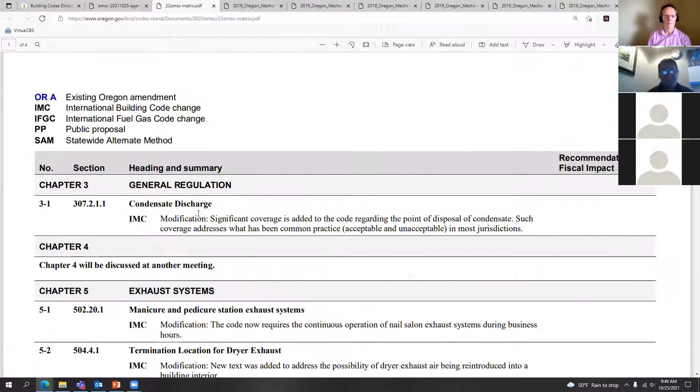This is what's going to help us through the flow of the meeting. Each item has a number - I used the chapter and then it's 5.1, 5.2, so that we can add more without renumbering a million. This is just a tool. It will change over the course of the committee meetings, and I'll be updating them after every meeting. I'll be posting them and then emailing them to all of you, the committee members, to make sure that I annotated everything properly, and the way that you think the committee went. I will get things mixed up sometimes just through editing, so please keep me honest and I will fix everything as we go.

Then over on the committee page, there's the code amendment proposals - we have 4 of them. None of them are on the schedule today, they will be on the next meeting. And here's all the code docs that we will be going through, which you can see from the committee page.

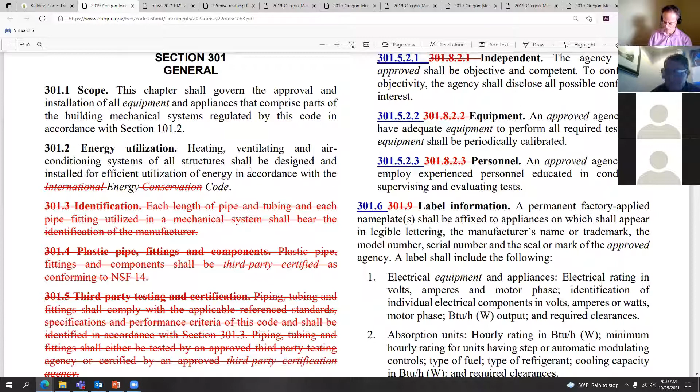And in each code doc, we have colors and other markers you probably need to know what they mean. The cross-through in red is what we - our current amendments - currently delete from the code, from the model code. If it's underlined and blue, it's our added language to the code. If it's in a box, it's usually a text box - you guys have seen the code - it's a note or some information outside of the code. And then if there's new language - if it's new IMC language, it will be in purple. It doesn't look purple on everybody's screen, so I learned that.

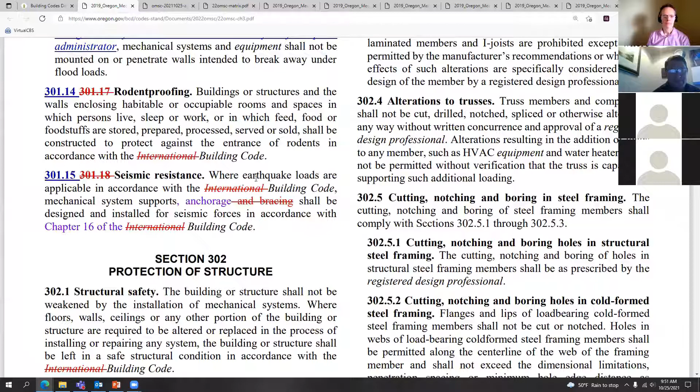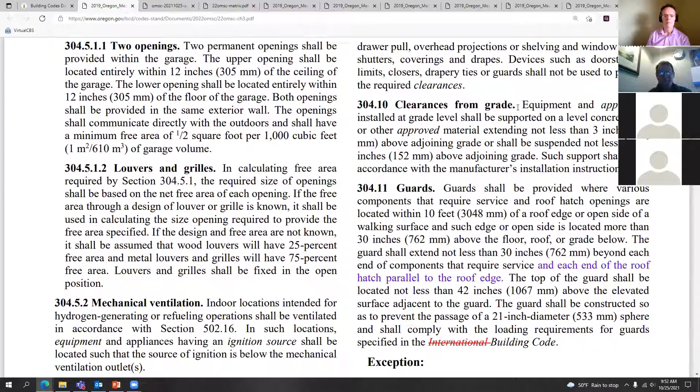It looks super purple to me, but that's new language. If we have to show the strike-through language, I do have the significant changes, or the red line, to show you and put up on the screen so you can see exactly what was deleted. There might be a few places where that is. And if we add any language, a new code amendment, I'll make it a lighter or brighter blue with underline, or a brighter red for strike-through. That will happen if you guys make any edits during the process.

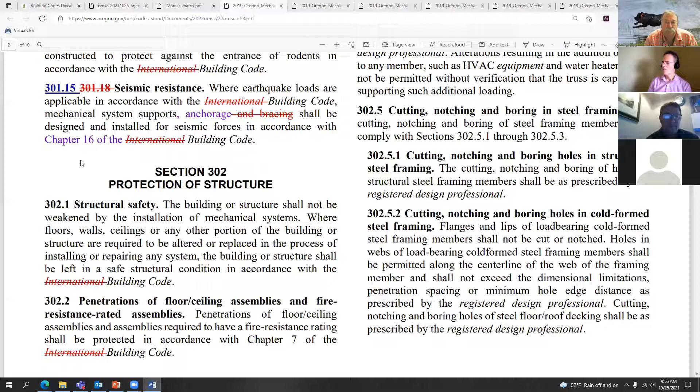So we'd scroll down a little bit more. We might head down another page and maybe see some of the minor purple things that happen in the model code about bracing, where they're under seismic resistance under 301.15. Again, really big coverall here about when earthquake loads are applicable in accordance with the building code. We reference chapter 16 of the building code and talk about anchorage in our code. So this has been a long-standing revision for us here in Oregon, but I just wanted to point out one of those purple pieces.

And we will try and head down to our first matrix item.

Laura, if you could stop for just a second, go back up to show people - we now have a revised barriers for vehicles drawing. It's been revised, much clearer now. I'm trying to remember which code it was in, but one had a typo where the pipe bollard option 1 said 1/2, not 12-inch depth on the bollard. That's been cleaned up, a lot easier to read.

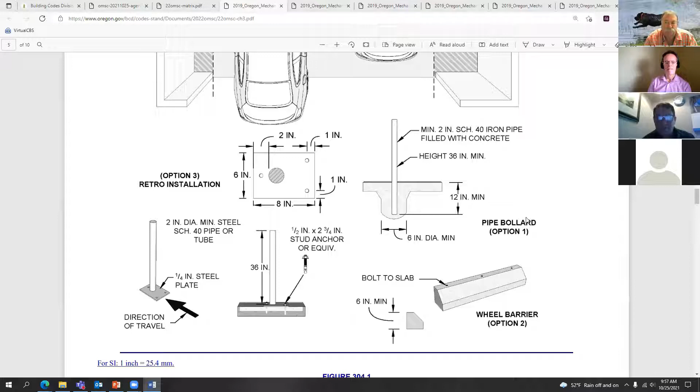Staff redid these. One note about this is that in the structural code, there are requirements for protection of appliances in parking garages, and some of that comes here - this is for when you're in a commercial garage, protecting any appliance. They either need to be elevated, or if they're down low to where someone might hit them, there's a requirement for protection of appliances. This is sort of the private garage view. Thank you, Laura.

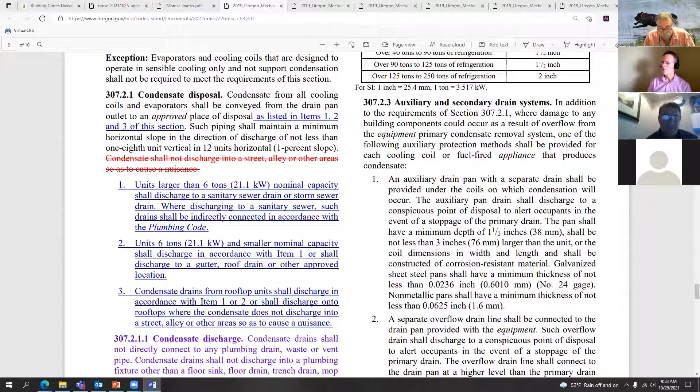So here we are on condensate disposal - this is our first matrix item, 3-1, about condensate discharge. The discharge - they're discussing how and where it can be. It's really complying with our plumbing code. To be an indirect, it needs to go either to a floor drain, floor sink, trench drain, mop sink, hub drain, standpipe, utility sink, or laundry sink.

What they're clarifying - and the commentary has a really nice description of the different places that the indirect discharge indoors can go to - and also showing that there is an allowance for connection to the lavatory Y branch or tailpiece, or to a bathtub overflow tailpiece, is allowed. That is done under our plumbing code as well, just clarifying where and how you can - don't just have it drip into a standard lavatory, say in a dwelling unit.

And one other clarification in 307.2.1.1 is the last sentence that says, except where discharging to grade outdoors, the point of discharge of condensate drain shall be located within the same occupancy, tenant space, or dwelling unit as the source of the condensate. So this is to really make it clear that, yes, if it happens to plug for your dwelling unit, you see it's going to where you can have someone service it, so that they aren't crossing potential lines of ownership or rental agreements - so tenant space A, their drain has to connect either within the tenant space or be piped to a separate outdoor discharge to make sure this can be maintained.

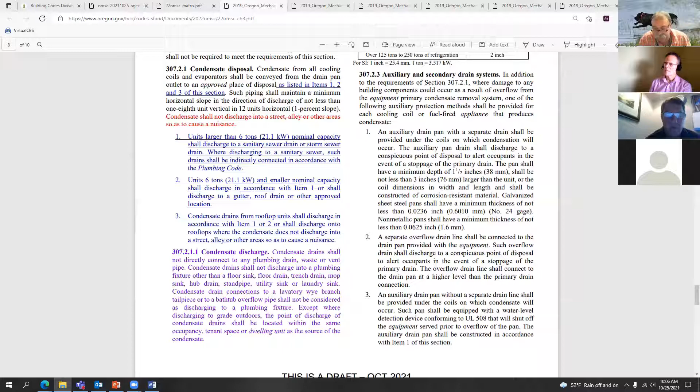And then I did have one other question on 307.1.1 identification. Is a Sharpie okay? Determination.

That sounds like your approval on this one. I don't think we have enough clarity here, and we could maybe ask, we have an ICC person here, whether they know what the intent was at the national level.

Rich, are you available to maybe give some feedback on 307.1.1 on the identification and what the intent was for that?

Yes, sir. Sorry, I was trying to get my mute button to come up. I apologize for the delay. The intention, if you look at the code proposal, was just to make sure we're identifying which one of those is the primary and secondary drain, so it's readily visible to the occupants when the primary is stopped up. I do agree it would be up to the building official's interpretation of what they would accept for that. But there was no requirement to say a permanent sign, anything like that. I don't know if that helps or just adds to the confusion.

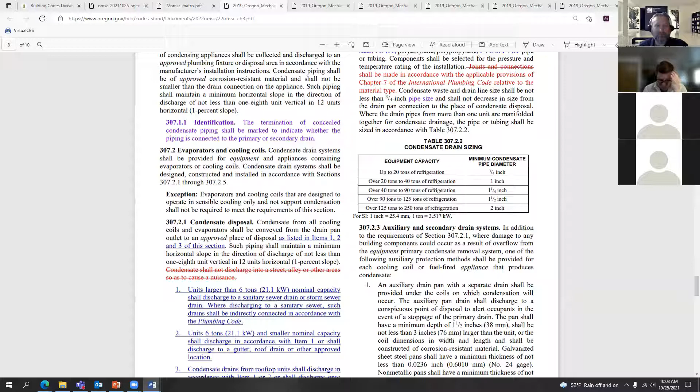And back on item or option one, I was going to say I support the notion of adding 'or approved location' to give the code official some latitude there. Yeah.

So to the committee, let's start with this first on maybe getting some clarity about the larger ones. Is this language acceptable to everyone on the committee? Jeff, yay. Nate, okay, I'm good on it. Yeah, it's always been clear to me. So we're good with that.

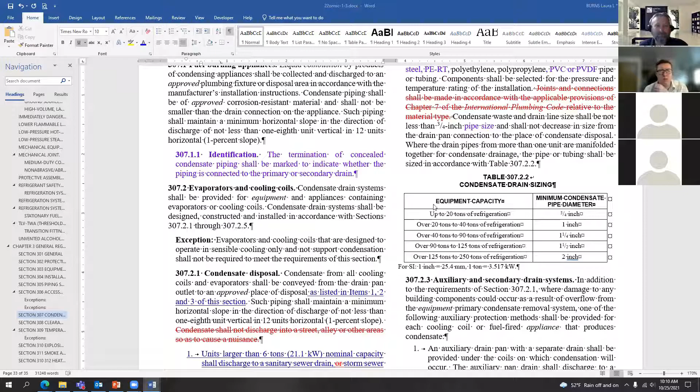And then as for the new language of 307.1.1, it looks like this is really just making sure people can identify, and that your inspectors can clearly know when they're out there which one is which and where it's coming out. Just knowing the number of different ways this can happen, this is going to be your inspector's call. And then, so now down to our one big matrix item in chapter 3 about marking—

Can I stop you really quick? Yes. Sorry, but this is an example of what I'm going to bust in with, the change for the 'or other approved location' there, for the non-technical person, which is me. Does that open up less expensive options for someone doing this? I'm prying about the fiscal impact, which is going to happen again and again. Do you think this will create any cost savings, cost increases, anything like that?

From the chief's view, it's more a clarity issue of what has been happening in the field. I would say to the building officials, it's probably been that, although it could be called a potential cost savings or clarification.

Jeff? I really don't see a whole lot of cost increase or decrease. I mean, it just seems pretty basic and straightforward to me. All right, thank you both.

So to the 307.2.1.1 about the condensate discharge, this really is an alignment just to make sure that you aren't violating the plumbing code on how you connect things, and make your indirect connections to.

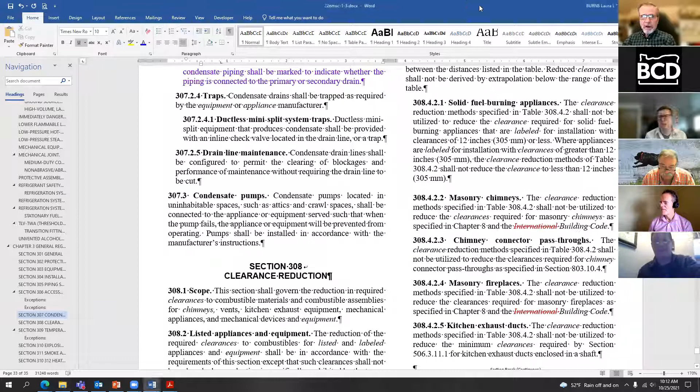Is anyone, if there are any other issues or things you'd like to look at in chapter 3, we've tried to make sure we get things that have to do with the fire code, we take some of those pieces out. We're addressing other parts later when it comes to chapter 5 and hazardous exhaust. We take out all of 310, all of 311, and when it comes to load calculations, you always have the ability to look at other design criteria, but we don't sub-reference to the I-code here. We stay within the mechanical code for sizing your equipment.

So with that, people okay with moving on to chapter 5? Hearing no further discussion, let's move on to exhaust systems. So if on our matrix...

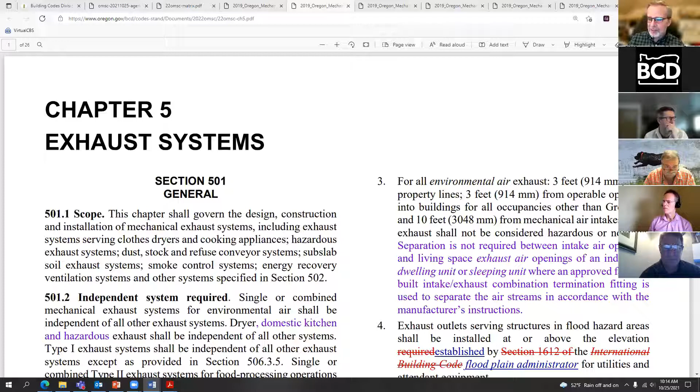One item here, and there's also a proposal about this later, but the very first item I'd like to show is item 5, let's stay up in 501. This always gets to be a fun item about what has to be an independent system. They're finally clarifying that 501 starts with...

Exhaust for environmental air being independent of other exhaust systems. But environmental air exhaust includes dryers and domestic kitchen exhaust. So one thing they're noting in the second sentence is that dryer exhaust does need to be independent of other environmental exhaust, such as bathroom exhaust, and that the domestic kitchen exhaust needs to be independent of those.

And also clarifying, yes, that hazardous exhaust needs to be independent of any other system. So you can't combine kitchens with bathroom exhaust, you can't combine dryers with bathroom exhaust, you can't combine dryers with hazardous exhaust. So just one of those clarifications that it's taken about 3 or 4 goes at the scope and the independent system language to finally get that clarified.

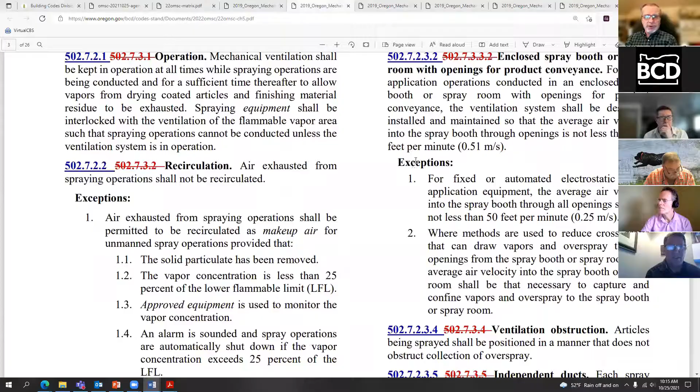This is just a little clarification on that. So we'll move to one of the... okay, we'll keep going, Laura. We are at 502.20.1, which is on manicure and pedicure station exhaust.

Oregon was one of the first states to set up the requirement for exhaust from manicure stations. And of course we know the building officials have always had the comments of, well, I'm using clean nail polish, do I really have to do this? And how do I set these up?

It's in the model code now. The one item here is that the exhaust for those mani-pedi stations needs to have controls that operate the system continuously when the space is occupied. Some people have had them where they don't turn them on. It's really to say that when the building's occupied, you need to be running these exhaust systems, which aligns with standard operation of most exhaust systems. It's having some sort of interlock or whatever to make sure that when the building's open for business, you do run the pedicure exhaust so that you're getting those fumes from the nail operations.

That's a model code change. This likely would have a potential cost impact because it potentially triggers some interlocks with the occupied setting of the thermostat, a building time clock, or an occupancy sensor or something to make sure this is working. I think they might have had some discussion at the model level about making sure this ran, because people were just turning them off, and you're still filling up the building, or your neighboring tenants, with a lot of those odor complaints that I think a few of you have been through in the past.

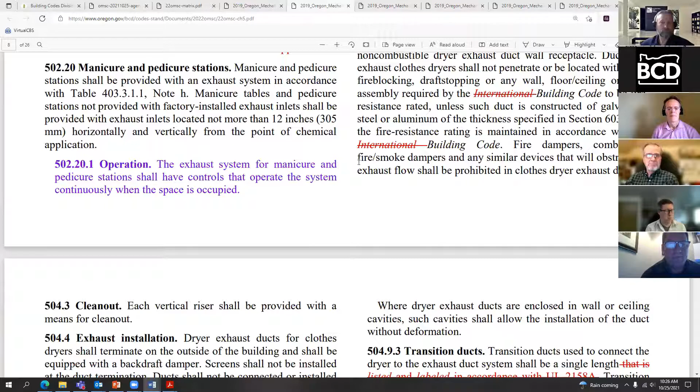Next one, let's go to termination of dryer duct exhaust. So some residential dryer MIIs do list termination locations, and a lot of this residential dryer information relies on their listing and how they've looked at the setup for their particular dryers. Some can move air farther, some have differences in what they want for their discharge opening, but they're getting pretty consistent on that. This is stating that when the MII doesn't have a specific termination location, they need to be not less than 3 feet in any direction from openings into the building, including openings in ventilated soffits, because certainly we've all been out and probably seen a dryer duct that went right up into somebody's residential attic vent. This is to help clarify that.

I believe some manufacturers actually tell you to be even further, even lower, just like for condensing furnaces—everything's relying on their MII now, and some have specific instructions to make sure the water vapor doesn't go back into the building. So this is really, from my view, sort of a clarification that you can use the MII, and when it doesn't have a specific restriction, you need to be at least 3 feet from where the dryer ventilation might go back into the building.

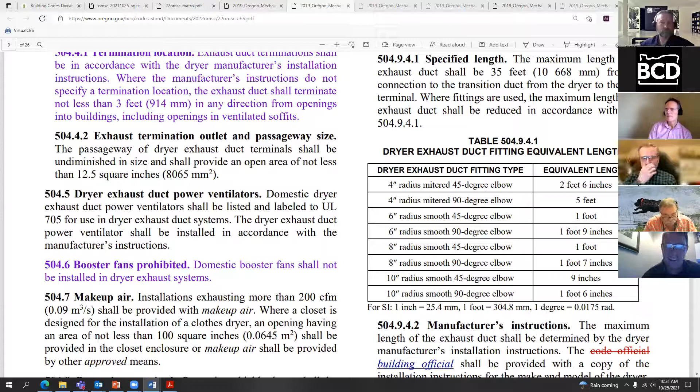Seems superfluous, but as long as 504.5 is in there, I don't see that we're going to have an issue. Choose whether it's no harm, no foul, or whether you'd like to do something about that. I don't think it hurts. I guess it doesn't hurt. And when you put it that way, it doesn't hurt. I mean, if anybody needs clarification, there it is. Okay.

Next item on the agenda is something we've had—it's an Oregon amendment that's been kind of significant with the mechanical officials the last time around and the board—about domestic duct installation. In the model code, they had gone with: duct shall not be joined with screws or fasteners that protrude more than 1/8 inch into the inside of the duct. So they were thinking about maybe some shorter pop rivets or short screws, but a lot of people, just to give some background, were uncomfortable with having to figure out, hidden inside the duct, whether that's really 1/8 inch or more protruding into the duct. That's why this was struck the last time.

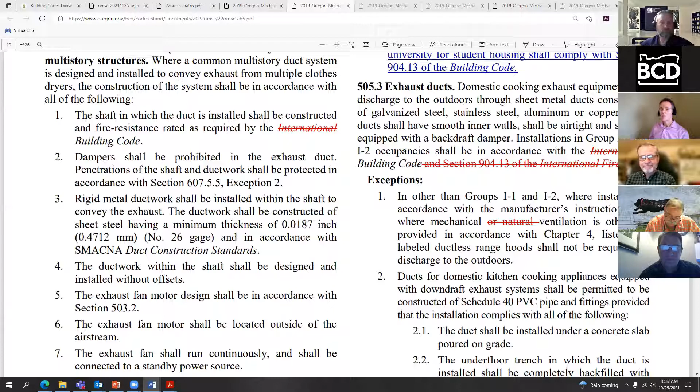And this is really aligning with chapter 4. The I1 and I2s do have mechanical ventilation for their cooking appliances for those locations. That's one location where we do want to have a hood there for them to continue to take out - no options for doing natural ventilation for domestic appliances in an I1 or I2. Really want to be able to exhaust that out. That's just a minor past modification. Any heartburn continuing that?

Let me just bust in again for a second here, same basic question I'm gonna be asking all day. Does removing natural ventilation as an option create costs for anyone, or are the other options you would be required to use more expensive?

This, real quick Andy, this was an existing one. So this is just continuing an existing, this is not a new one. So then don't mind me. Same with this, it's just continuing a past allowance.

Laura, was this a pass? I don't believe. I want to make sure on this 505 point, let's look. Yeah, it's 505 point. We have removed this in the past. Yeah, I don't see it. Oh, I believe this had to do with just sort of a redundancy. It's covered elsewhere in the code.

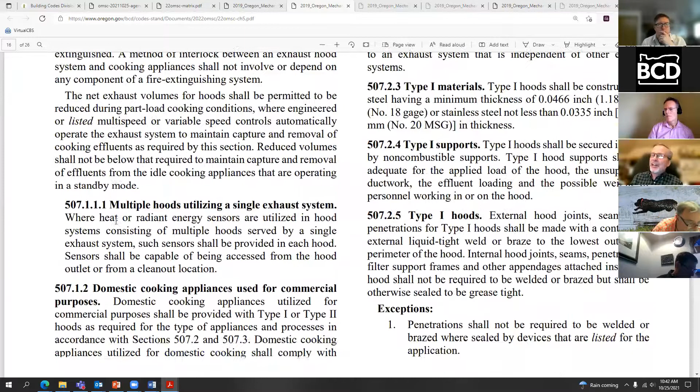We're not going to put in a type 1 hood in our little church or fire station or employee lunchroom, so here's our exception for that. Most building officials have asked that they put in their file what they're going to do with it, so that if they suddenly turn it into a commercial operation where they're cooking daily, or going from potlucks to 200 meals a week, you can say that's not meeting how they did their permit. So that last piece was a deletion to allow domestic cooking hoods for non-domestic purposes, out here in 507.1.2. I know that wasn't the best explanation, but it's just to eliminate a redundancy, putting it in the place where it's more appropriate.

There are going to be times where a domestic cooktop range or open top broiler might need to be used for commercial purposes that aren't appropriate for underneath a residential range hood. That's why we're taking care of that language here.

I think that's a better way to go than what's stated in 505.6, because that's an open door. Everyone good with that? Maintaining current amendment. All right, let's move on.

506.3.2.5, unless there are other items you want to go over. In Oregon, the mechanical officials have liked the grease duct test to either do a light test or another approved equivalent method. There are methods out there where they put a pressure washer down inside the duct and spray to the side to see if you get leakage out. Other than just a light test, this is providing options to let the building official approve a different test method for grease duct leakage. That's the main purpose here, it just gives you guys more flexibility in the field.

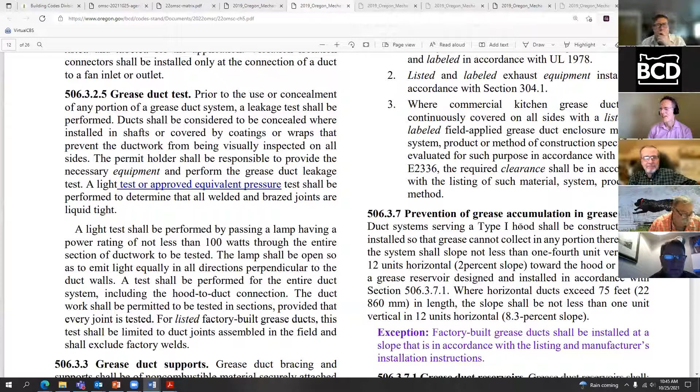Any questions on that past Oregon amendment? Good to go?

Grease duct slope. For those super long grease duct runs, there's been a requirement for a sort of trap clean out in the duct. A lot of these longer grease ducts nowadays are these new manufactured, factory fabricated ones, and their clean outs are a little different than the standard, where you're assuming you're welding a big rectangular duct for 30 feet horizontally. These manufacturers of the prefab ducts, that are fire rated, whole nine yards, have their own clean out version. This exception is allowing them to do their clean out version for clean outs and traps in accordance with the listing of the manufacturer's equipment. So that's another option to allow, if it's a listed grease duct system, to use the slope that's in their listing.

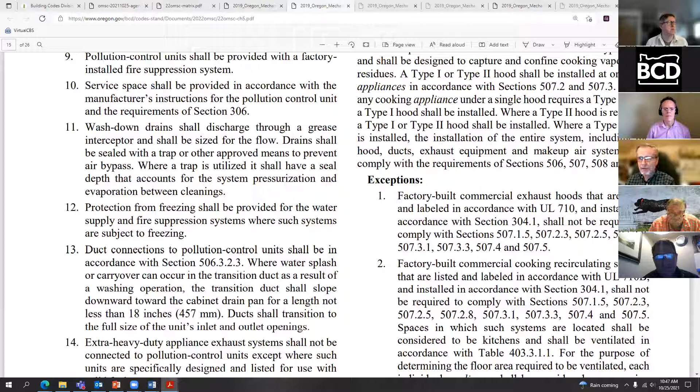Smoker ovens. I've had a lot of calls on this one in the past. Thank you, Laura, you can bring up the smoker ovens with integral exhaust and how we treat some of these.

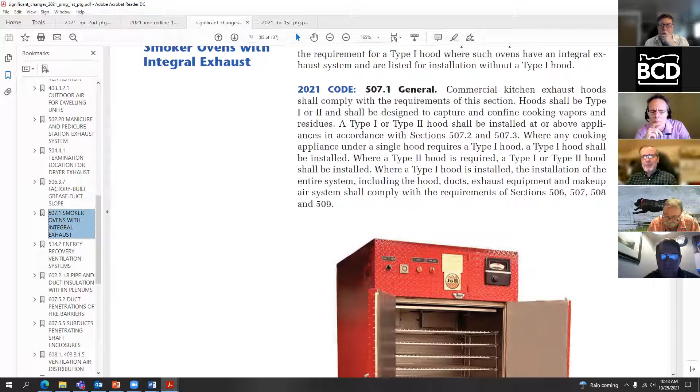There's now a new exception for smoker ovens from being under a type 1 hood when they have an integral listed exhaust system. We've always had these questions of what happens with these - it's odd, for what goes under a type 1 hood, it's sort of a square peg for a round hole, how does it fit in there. They now have listed units that have integral exhaust from them that allow them to not be under a type 1 or type 2 hood. There was always a question of whether or not they were grease producing. Well, they sure produce smoke, and a lot of grease does build up in the bottom of them, but if they have their own integral system, this is one of those pieces where they can go to the exterior on their own.

There's the new language.

This is sort of like the pizza oven issue we had in the past. It's designed to contain it, it's got the wood burning on it, it's got its own way of venting it. Putting a hood over something that's all self-contained, it's not going to exhaust anything from it because the doors are closed all the time. So just for my own education, an integral exhaust system on a smoker means there's a separate duct or pipe that goes to the outdoors for the smoke.

Yes. And so the type 1 hood is just for heat, really? Well, a type 1 is normally intended to grab smoke, grease that's being released - excuse me, type 2, sorry. Yeah, type 2 is mostly for moisture and heat. Yes, okay.

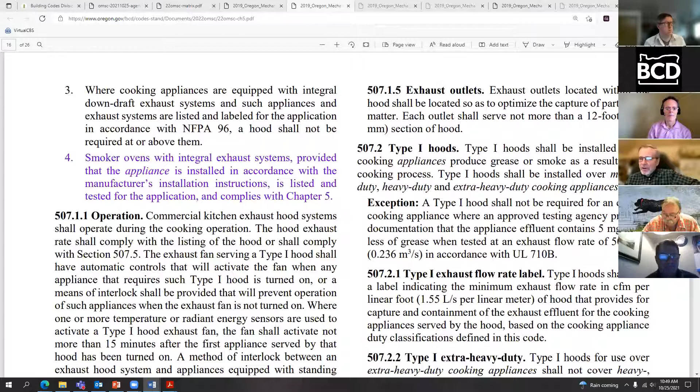So we're back to that last issue. I think we settled this one about what we try and do. This helps you when you deal with people who need to just put in a small stove or something for domestic type operation, allowing some flexibility for that break room, but also giving you some ability to look at these afterwards.

There was one instance where a local jurisdiction's grease police found out that there was grease coming from a certain location that had said they were just going to be an employee break room, but they were cooking for a preschool of like 50 meals 3 times a day, which wasn't what they had on their original permit application. So that's the type of flexibility we're allowing, but giving you the ability to address that in future.

Next item is, so I'm assuming we're good with that since we accepted the other change. Collectors and separators under 511.1.1.

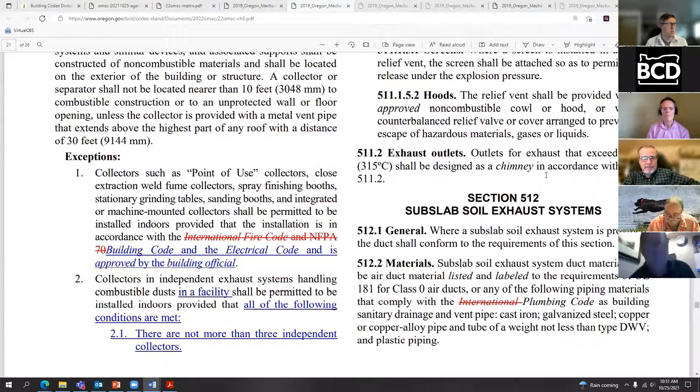And this has a lot to do with woodworking shops and the like, on making sure this is really an alignment to make sure that when we're looking at dust collection systems, if you'll scroll up, these are in the exceptions.

Oregon has had an exception to allow small systems to not do the full meal deal for wood dust collection with up to 5 dust producing appliances, and also noting that it's installed in accordance with the building code, the electrical code, and approved by you, the building official. These are, like for those small wood workshops, to avoid full-on explosion relief, but making sure that it is installed per our building code and the electrical code.

So this is for an approved system to do a little bit more flexibility on those small woodworking locations. Just a long-standing Oregon amendment that last code cycle got cleaned up a little bit more to make sure it was clear on how many drops or appliances you could connect to in a woodworking shop.

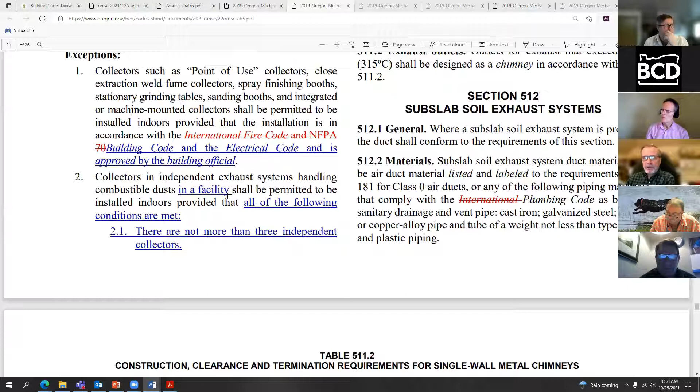We're limiting it so you could have 3 small dust collection systems, each serving no more than 5 appliances each, is the real intent. So you can have a small one for corner A of a woodworking shop, one for corner B, and one for corner C. That, and just making sure that our alignment is with the electrical code, and the construction portions aren't in the fire code. We now have brought those into the building code.

Any heartburn on this one or discussion from the group? We're good to go on that? All right, and last one is a new additional requirement

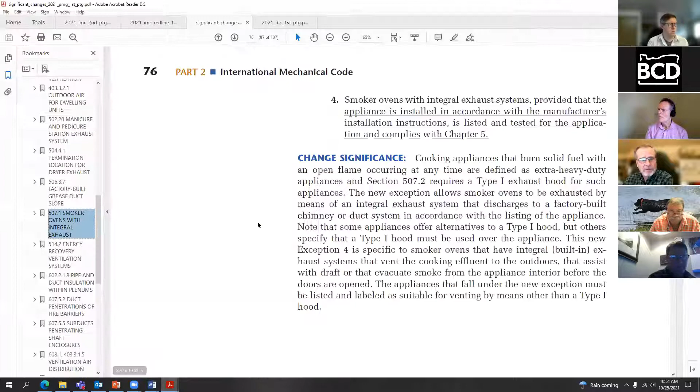on energy recovery ventilation systems. I'm looking for this. It's striking out the word. You can now do, you're now allowed to do energy recovery systems on type 2 kitchen systems. It's still prohibited on type 1, unless you have a specific listing or something special on that on the ERV.

There are a few that can potentially do type 1, but this is saying that if you have a type 2 hood in a kitchen, really it's dealing with heat and moisture. That's all it should be going up through it. You're now allowed, when it's potentially listed for that service, to do a heat recovery unit on type 2, so you could actually do it on the dishwasher hood. A lot of heating off of that. It's not prohibiting that anymore.

So any discussions? Okay, nay. Wait, yep, okay to move on? Great, we're on. Oh, does anyone need a break? Maybe 5-minute, 10-minute break, or are we good to keep rolling on this? Asking the committee members, we get some okays?

All right, we will roll through in chapter 6. We'll go to 602.2.1.8, pipe and duct insulation within plenums.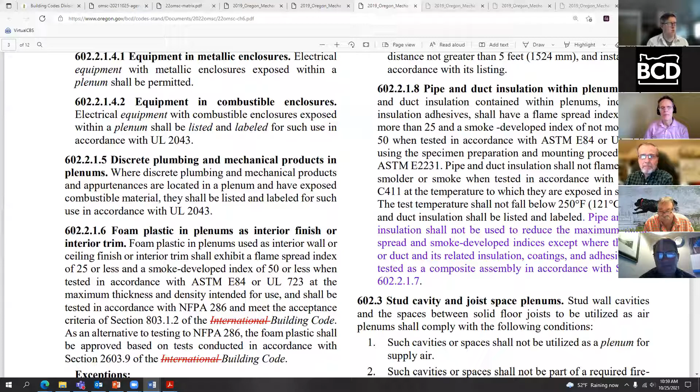All right. Well, then with that, we'll move on to... Oh.

Our committee, last go round, has been maintaining an older table for dwelling unit duct construction metal thickness. It keeps some of the smaller ducts a little thicker. It was getting to, they were a little concerned last go round, almost all the way to 30 gauge for some smaller duct, and for long-term construction of a condo or dwelling unit, they wanted it a little bit thicker, about one gauge size, so they retained that level.

If you look down below, the strikeout is also based on having the designer look at ducts over 1 inch water gauge construction versus 1/2 inch and what was in between. It also keeps the table a little simpler for designers and the building official to look at. And I think some of it was also that the aluminum was getting really thin at one point, which was the other concern.

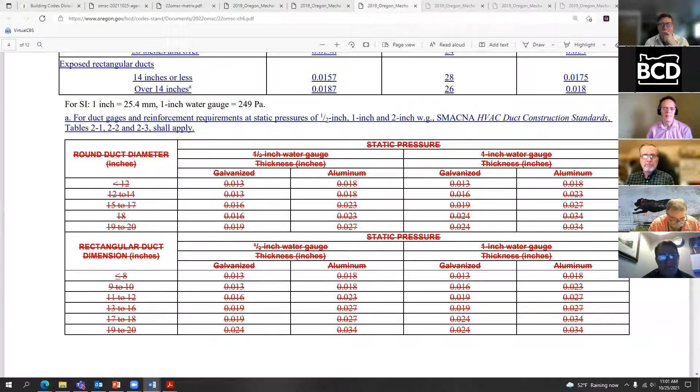I like it. Jeff? I'm fine with it. Okay, we'll roll along.

Duct penetration of fire barriers. Where are we here? Or is that...

This is one that always bothered me as a designer, trying to explain this to people. There's an allowance where you're in a large building with tenants and you hit a 1 hour penetration. If you're maintaining metal duct, the code used to say metal duct for the whole system, meaning from the air handler all the way to the discharge grille in a tenant space. If it was metal the entire distance, you could avoid a fire damper where you crossed a 1 hour wall, and the return duct also had to be metal all the way back. This is clarifying that you can have a flexible connection back to the air handler, because that requirement was making it very hard to do, since some bigger air handlers have a flexible connection for noise and vibration and disconnection purposes. That was preventing them from using this exception to avoid a fire damper.

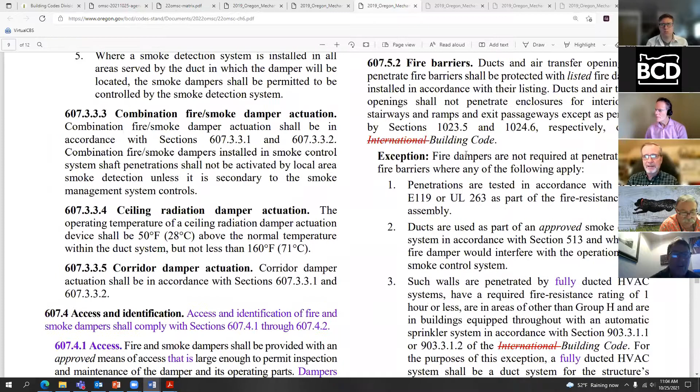So theoretically, that could be 2 feet past the rated partition then, right? That is...

Non-metallic flexible connections that connect duct and air handling equipment within the mechanical room, non-metallic flexible air connectors in accordance with 603.6.2 that connect an overhead diffuser. So yes, it can be within 2 feet. Yes, the way this... good.

Would you be interested in a minimum of... from way back for me in the Southern Building Code, there was like a 6 foot or something like that, many years ago.

Obviously, this is for a fire barrier, not a smoke barrier. It's just a separate section. I mean, is there any analysis on this for smoke or fire propagation?

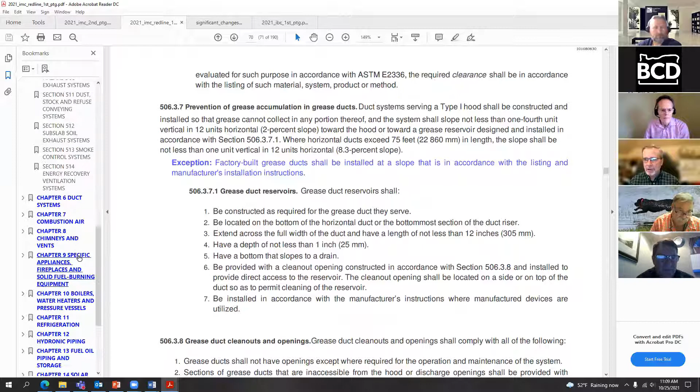I'm bringing up the red line on my screen just to check this out.

The flexible air connector is permitted for a fully ducted system, limited to the following installations, is what the model code says. And that was added to the end of number 3 exception. You see that there? Right.

And I just wonder if the model code now is in line with what your previous amendments had. I think I just accidentally made them purple. Okay, I went crazy with the purple.

Really, this is now aligning with the model code. Yeah, just aligning with model code. But is the last sentence new for 2021? Yeah, that often happens when local or state agencies make amendments that make sense. They often make their way to the model code a couple of cycles later, right?

So Laura, if we can get those sentences back into... Yeah, I can fix it.

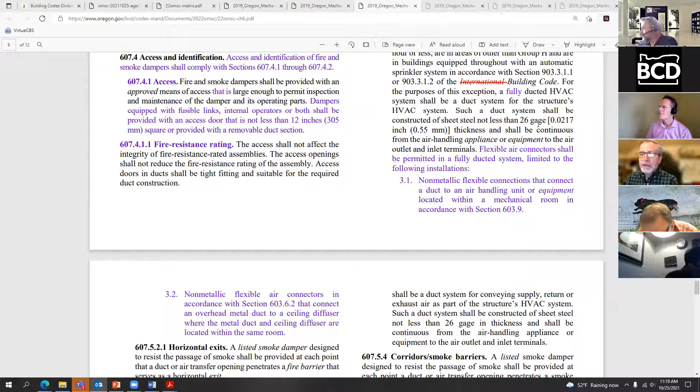Let's go to 603.6.2 so we can see how much of a limit that is on. Well, so 603.6.2, flexible air connectors, UL 181, but the limit is 14 feet. Yep, for a connection to a diffuser. That's on the screen right now, top left.

603.6.2.1. Trying to see whether - so for the building officials and Kevin - is there such a thing as a fire resistant flexible duct connector? UL 181, it's 2550. How about that? That's flame and smoke, right?

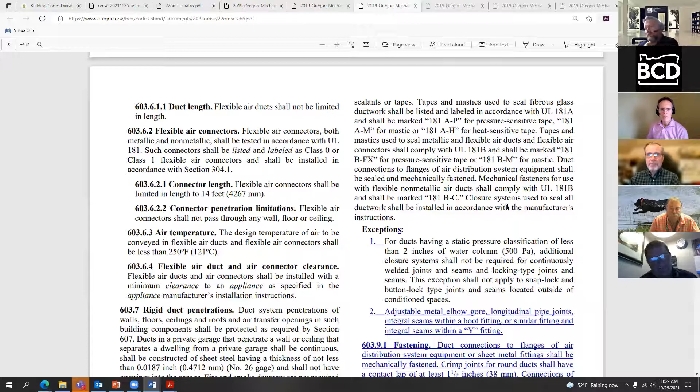How about the fire portion? Yeah, there's a little heartburn with it, but I think basically it's okay. Okay, all right. And for now, thumbs up. We can still - nothing prohibits coming back and discussing at the next meeting. So for now, we're going to call that moving on. No heartburn. Let's go to subducting at shafts.

They are just, I believe, making sure that the subduct - we've all been familiar with the 22-inch subduct issue for a while - it's clarifying that the thickness of the material you use to create your subduct has to be the same, should probably be at least the same or better than 26 gauge, or what you're building the shaft or your vertical duct out of. And clarifying the additional language in here about the exhaust fan at the top being clear that it needs to run per 909.11 to maintain the continuous flow upward. Just avoids having to do a lot of interpretation of how to get to section 909.11.

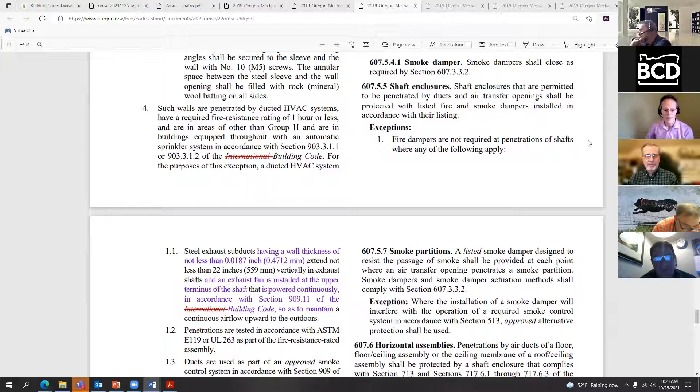So that looks good, but asking the group - anything the group would like to add? That seems like a good clarification. Right. Ventilation air distribution, 608.1.

There we go, on balancing, putting in some language that's kind of been in and out through the years about having the method to actually adjust the system, and giving, through an approved method, back to the building officials — ventilation and air distribution shall be balanced by an approved method, and the balancing shall verify that it's capable of supplying and exhausting the outdoor airflow rate.

So we've had the bit about making sure people had a ventilation schedule for their outdoor air on the plans, normally for bigger buildings, smaller ones probably just part of the small local system. Giving a little bit more for you to have the method you want to see for showing that they've balanced the ventilation air, to make sure we're getting the proper outdoor air.

Any questions on this, back in the code for a little extra? There's a little bit that can be pointed to in the administrative, but this is adding a little extra for the designers to see some minimum they need to provide to the building official and the contractors when they're in the field.

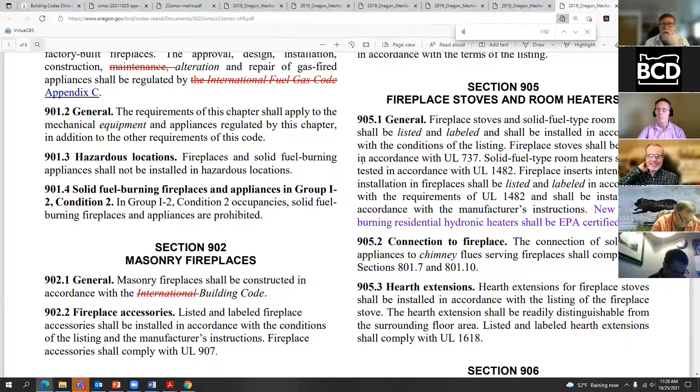Here's one for our building officials, on unvented alcohol fuel burning decorative appliances. They now have these little decorative gas or alcohol fireplaces that have a UL listing and need to be installed in accordance with the listing, MII, and Chapter 3 for clearances to combustibles, of course.

Any comments on these? Have you been seeing any of these at all?

Had questions a few years ago on one, yes, because they've got the pretty glass rock and they want to have it in their bathroom as a decorative appliance. Had a couple of questions — it's been a few years because they didn't have a listing at that point, and it was sort of, well, I can't get you there currently, and fuel burning appliances need to have a vent unless there's some other thing that goes with it, and here it is now.

What we don't have in here is — I've had questions from people looking to put in alcohol burning stoves, like from a ship, a sailboat. They were going off grid and wanted an alcohol stove, and of course we don't have anything for that. But to be honest, I haven't had a question on one of these in a while — it's been a long time. But this is giving them, now that they've got listings for them, the ability to allow their installation.

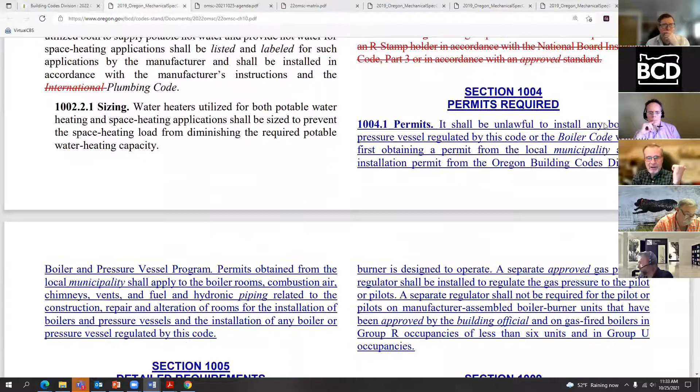We do pull in those things where downstream of the boiler, we can scroll down, Laura, just to let people know we've brought in those pieces that are not in the boiler program sometimes, such as we get into clearances with building code, the enclosures of the room aligning with the building code. But there are certain pieces such as expansion tanks and some of the pumps and safety relief pieces that can be outside of the boiler program.

So we had to pull in as much as we could to make sure we still had coverage. Boiler program draws a box around what they regulate. This is for those pieces that are outside of their box, including drainage in the room. We wanted to make sure we had that. Vents are always in our world. The combustion air is always in our world, and we cover those. We have cross notes to where we get to that information. So there's really no action for 10 unless there are things that you wish to get to.

Everybody open to go to refrigeration? All right, let's go to chapter 11.

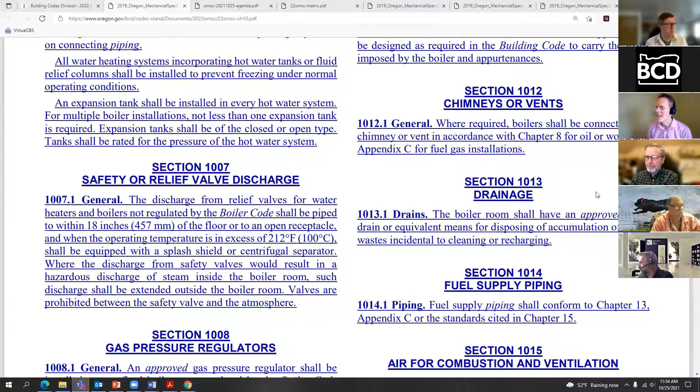As we go in here, the first piece here is a note, should have a note, it'll have a note box around it. If we zoom in a little bit, Laura, the boiler program does get into some of the requirements, and there are some rules for brazing qualifications that have been in there for a while. We just need to put a note box, or there will be a note box around that first blue note you're seeing here.

The biggest piece, if you look at item 11-1 throughout. Hey, Mark, can I bust in here for just one second because I might have spaced out?

Did we get was it a unanimous yes on 10-1 protection of water heaters? I know we moved on, but I either missed the confirmation or I glazed right over it. I just want to make sure.

I think this really winds up being a non-issue for us in that it's covered, it's really pointing to us via the structural code and what happens in the plumbing code, although the committee does need to give a... this was really more an informational for the committee that the plumbing code has protection requirements.

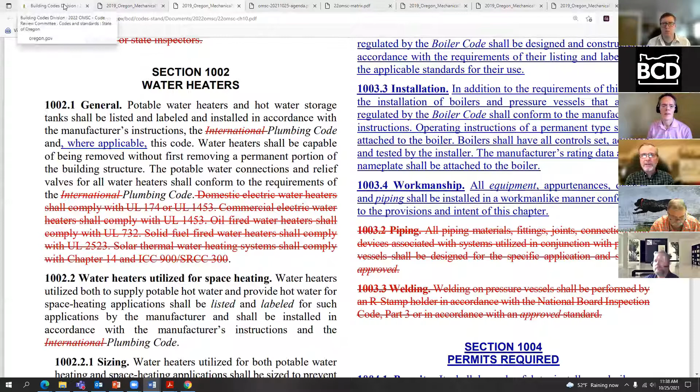So that's whether it's an electric unit heater, gas unit heater, all of these, everything needs protection. This probably didn't need to be on the list, but I wanted to explain what that was and see whether the committee wanted to discuss in any more detail on that. Looks good to me.

Okay, so one of the biggest items in the refrigeration chapter is that instead of having separate notes about refrigeration, it relies solely on the IIAR regulations and their standard. It just sub-references the ammonia compliance books. So there will be fewer references to ammonia throughout. Where are we down here?

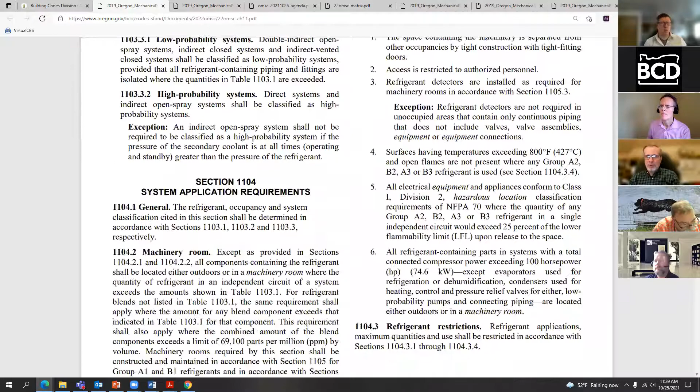Yeah, so that's it. Just seeing whether the group will, as we scroll through here, we'll show different spots where IIAR came in and where notes about specific ammonia refrigeration room requirements left off, that it's relying on those design standards found in the IIAR standards. So we can find some down through.

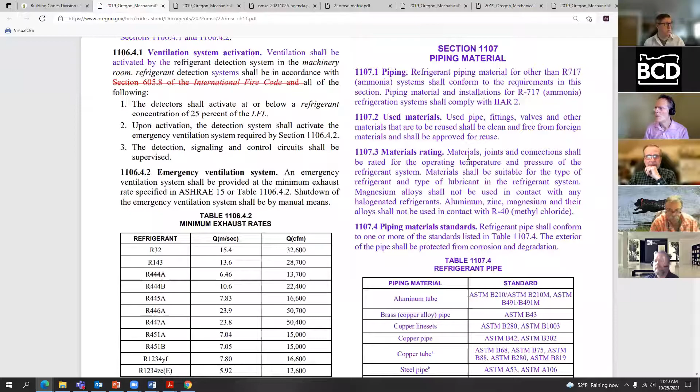I know there's some more. No, we still have some of these. This is new language for joints and connections. Oh, I think it's just saying they're going to defer to the entire IIAR suite of documents. So that's really where we're talking about refrigerants other than ammonia and coming back to 1101.1.2.

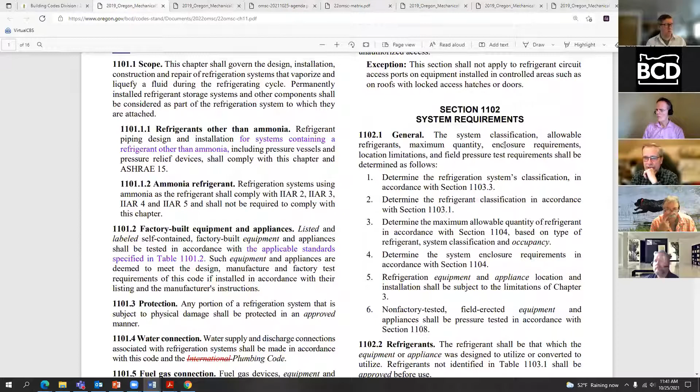One of the next, and so we may come back to this after we've gone through the entire chapter to item 11-1. But the next one is our current statewide alternate method 2101. Just want to go to section 11, chapter, excuse me, matrix item 11-2 about refrigeration standards, which has to do with section 1103.1.

At the last one this year, as new refrigerants have been coming online, there's a rush to get new low carbon dioxide equivalent refrigerants out. And the way the code is written, if the refrigerant is not on the particular list that's printed in the IMC, it has to be approved by the building official for use.

Some of the refrigerants are coming out quick enough that some of them are winding up in ASHRAE standards 15 and 34. So they've been tested. All of the IMC is based on standards 15 and 34 for safe refrigerants. ASHRAE's gone through that, they've worked with manufacturers. These are safe for use, here's how much refrigerant you can have in the building. There may be refrigerants published in the ASHRAE standard that have gone through all that safety analysis and requirements, but they aren't published in your IMC codebook.

The alternate is there -- excuse me, that should have been silenced. What we've done is under refrigerant classification, if you can see here in section 1103.1 in our statewide alternate method, was -- we'll start with 1102.2. Refrigerants not identified in ASHRAE standard 34 or in table 1103.1 need to be approved before use.

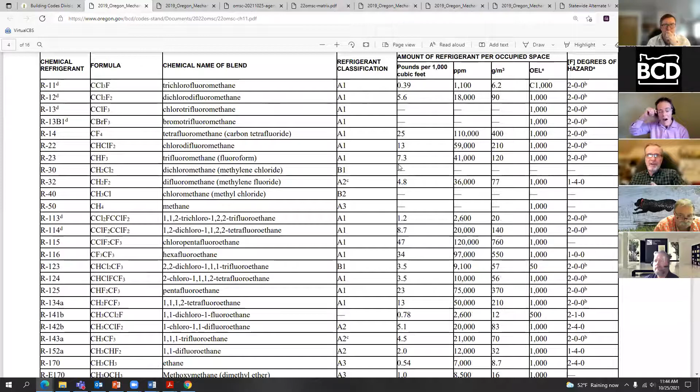This is that table that says here's how they're classified and the maximum quantity of pounds per 1,000 cubic feet that are allowed. All of these numbers came out of standard 34 and their safety look at it. What it's allowing is that should ASHRAE standard 34-22 come out, those could still show you those in that table and comply with those. Because I believe we're adding 2 to 3 pages of new refrigerants per code cycle now, just simply because so many are coming out.

This just helps give you a bit of confirmation that it's gone through, and the board went through this for the statewide alternate method and realized that, yes, in this push to get new refrigerants that can replace ones that are potentially harmful, there are other federal requirements to get new refrigerants out there faster and prevent them from being used improperly in a building. So the question for you as the building official is, are they exceeding the safe amount to where they have to do a refrigeration machinery room? When you're in a big grocery store, most likely you're past these levels for just about any refrigerant, so now you have to build the refrigeration machinery room. This is really about the triggering for the refrigeration machinery room.

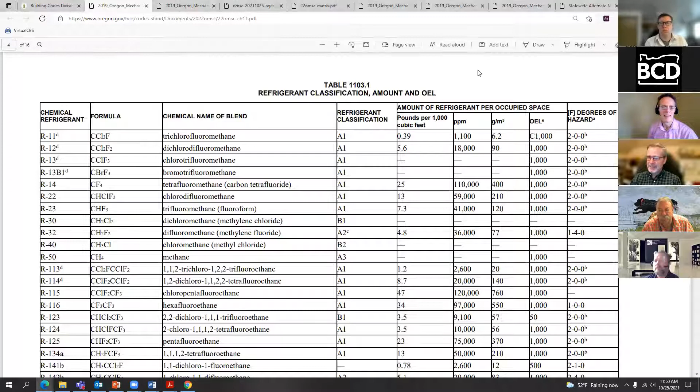I think if you kept the alternate method, that would allow more flexibility because we don't even know what's going to happen in the future. Maybe adopting the 2022, something else might come out at that point that we need to be able to look at. So take that as a recommendation to keep the SAM moving forward, no change in the book. That makes sense to me. Because there could be a 22A that comes out the next year, right, if the refrigerants are really piling on.

Okay. So 1105.9, the language from the IBC for egress out of a boiler room has been added here. Normally, we would probably just say means of egress shall be maintained per the building code, to avoid potentially having the structural board decide to go differently and avoid those changes. But this is, and I don't know, Andy, whether or not they've gotten to the means of egress from boiler rooms or not in the structural board committee yet.

Yes, they have. I was unable to follow that and find out whether or not they did anything with the language. I apologize for not having that part ready for today. They just had their meeting.

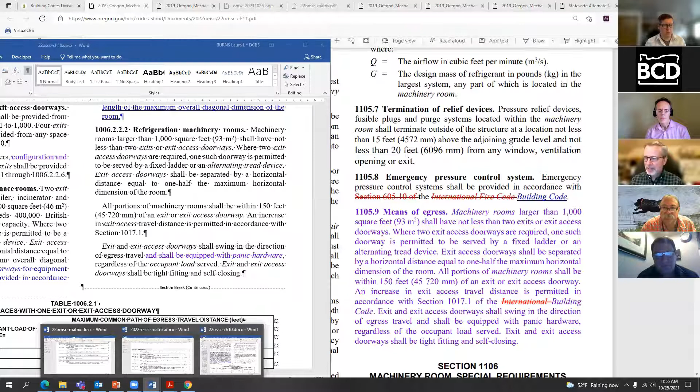I'll put down some notes on that. Okay, got it. Thanks, Laura. They said in the significant changes book, it just says they don't want it to be overlooked. So we're capturing the 'don't overlook it,' but find the language elsewhere, which is normally what we try to do. And here's where you go to. Great.

I mean, it just goes back to my documentation principles of say it once in the best place. Then you won't say it twice wrong. Anyway.

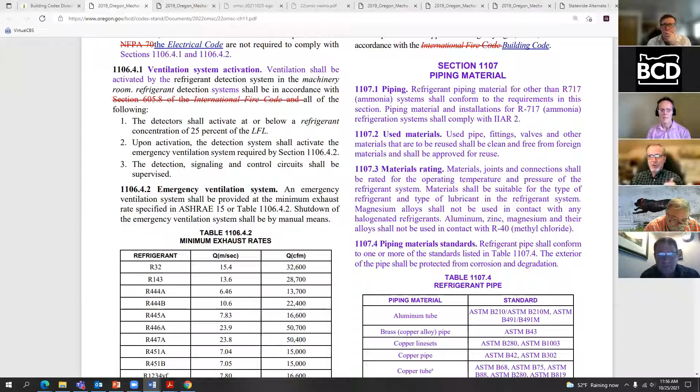Wow, okay, here's a lot of new stuff for our book. So, fairly simple refrigerant piping has now been changed to sections 1107 through 1110 on refrigerant piping, where we're getting into specifics for refrigeration piping materials. Let's do a slow scroll down through the specific refrigerant materials and a schedule for that.

In 1107, we finally get down through copper and steel and swage fittings, how to construct and the depth of the fittings, about expansion joints, vibration compensators, and also - I didn't understand that - down to joints and connections in 1108.

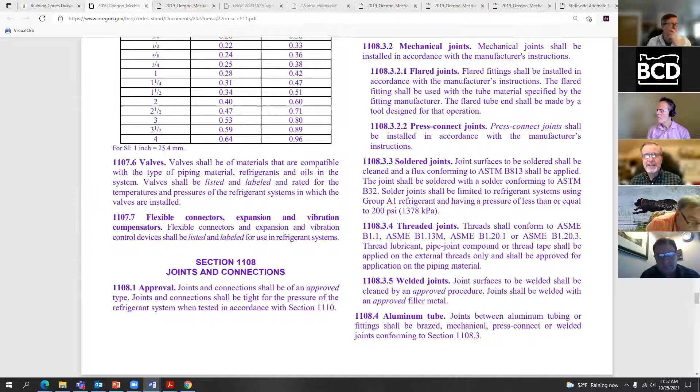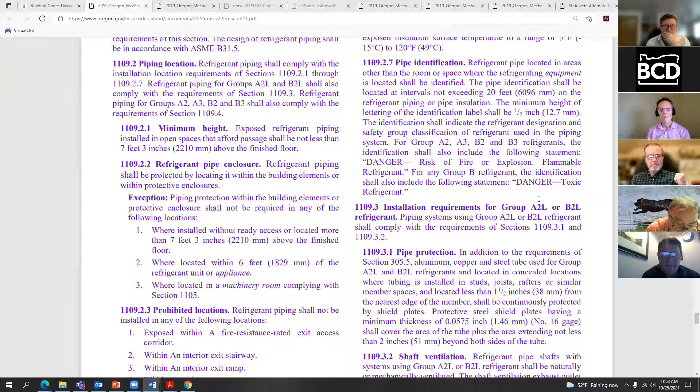Through the different joint types and how things can be put together, including press connection joints, soldered fittings, threaded fittings, welded fittings, aluminum tube. Let's roll through down to the next page, installation and the hangers and supports with the B31.5, and the part about minimum height of exposed refrigerant piping, which we had in our last code, making sure you won't bump your head if you need to get out of the room quickly and it's filled with refrigerant fog.

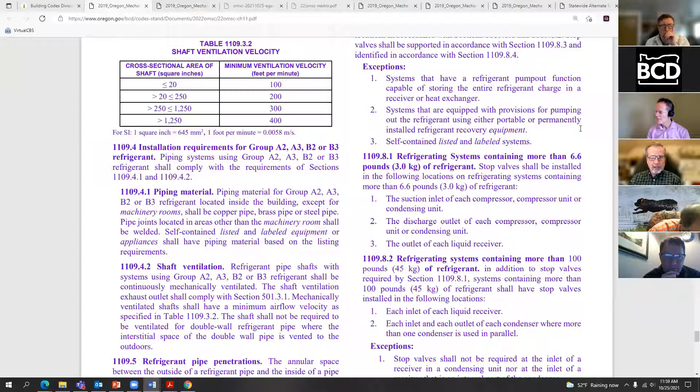Pointing out some past prohibitions, we had not allowed refrigerant piping in exit passageways. Their list is a lot more clear now. Here is additional information about requirements for A2L and B2L refrigerants, and shaft ventilation requirements if you have some of these that are potentially flammable or not as flammable refrigerants. Definitely higher ventilation needed for A2, A3, or B3, which are a little more hazardous refrigerants.

Talking about pipe penetrations in more detail, looking at stress and strain on pipe. We'll go up to the top unless you see something you want to stop and discuss. Looking at condensate control to make sure it's not raining in the room from refrigerant, or getting ice build up, or at least reducing that.

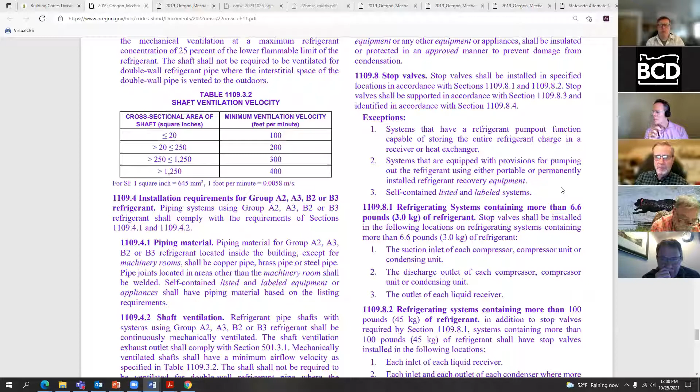Then back to, I believe, 1109.8.1 - I need to make sure that is correct - about stop valves for systems with more than 6.6 pounds of refrigerant. Some items for valves on systems over 100 pounds. I believe this will wind up being a cost impact.

And then as we go down, supports for the valves and identification of valves is a lot more detailed. These are for bigger systems, like at a refrigerated warehouse, something that's really big, supermarkets. And then refrigerant system piping test - let you read that for a second while I bring up... I'll try and see if there are any specifics under the current piping.

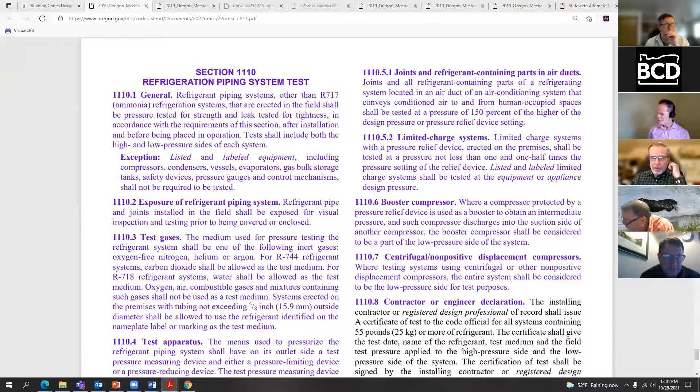So let's go down to the bottom of this, Laura, and then can you bring up the current OMSC, just to show section 1107 of our current code. We now have specific test apparatus and leak testing requirements that are a little milder. Laura, if you could bring up 1107 and 1108 of the current OMSC, that would be great.

In the meantime, what does the green text indicate? For 1110.8, it's showing up as green from my screen. That should be black. Yeah, it's black, that's existing. Oh okay, just an illusion, thanks.

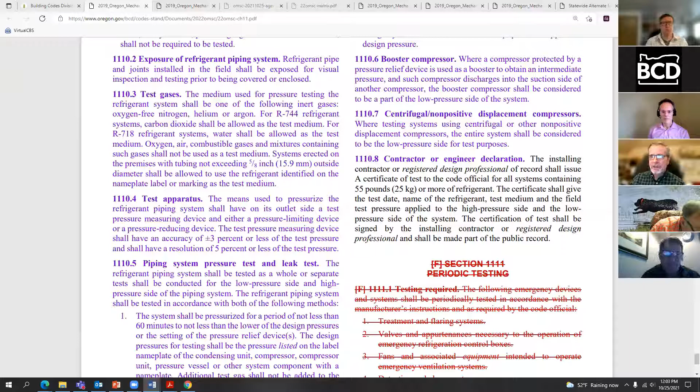Chapter 11, I think there may be something very similar to our current 1108.4 about certificate of test. Shall be provided for all systems containing 55 pounds or more. Yes, that's our current 1108.4.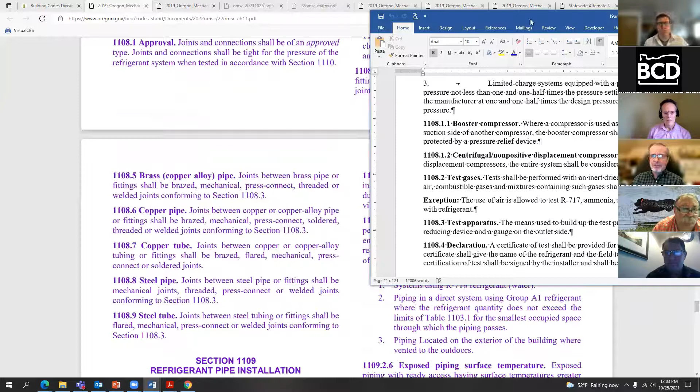If we can scroll up and roll down through 7 and 8, just to show the difference in detail of what was in the old code. You can just pull up the OMSC first, you need to slide that a little bit. Just want to give you an idea of the change in scope involved with this. So scroll up to the start of 1107 and we'll roll down through this.

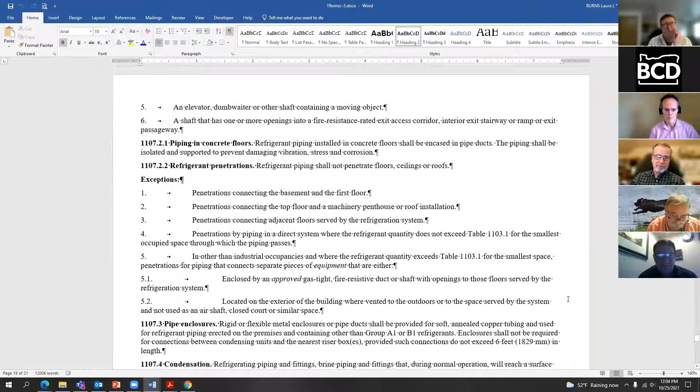The design needs to be in accordance with ASME B31.5. What they're doing is bringing a lot of that language in. We're maintaining the pipe prohibition locations pretty much the same as the current code, where they are and aren't allowed—definitely don't want them ever in an exit passageway. Some of the penetration language is found in 7.2.2, enclosures and condensation control.

Materials, now in 1107.5, are moving into a table with more options and different discussions about the different tube types. It's a bit more detailed than we currently have. Stop valves—it again has the trigger at 6.6 pounds of refrigerant in a system. Then it doesn't have the language of a second requirement for bigger systems with stop valves.

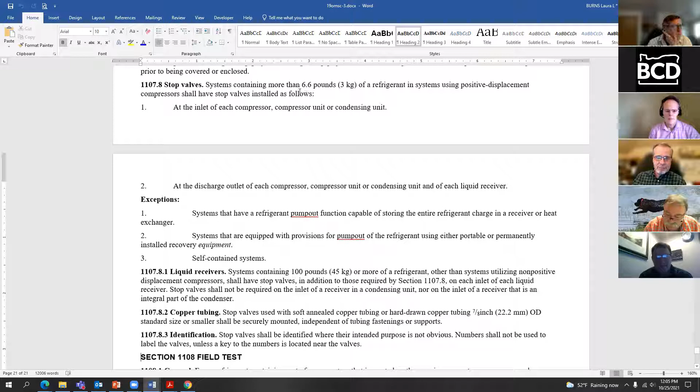Well, no, that is in 1107.8.1—you'll see a 100-pound system needing stop valves. Then it moves on to the field testing and how they do the field testing, with the declaration at the end signed by the installer, which shall be made part of the public record—that's the current 1108.4.

So that gives you an idea of what's being replaced now with materials and all the joints and what can be in here. I believe from the looks of it, they're just moving away from sub-referencing to other standards and bringing the language in.

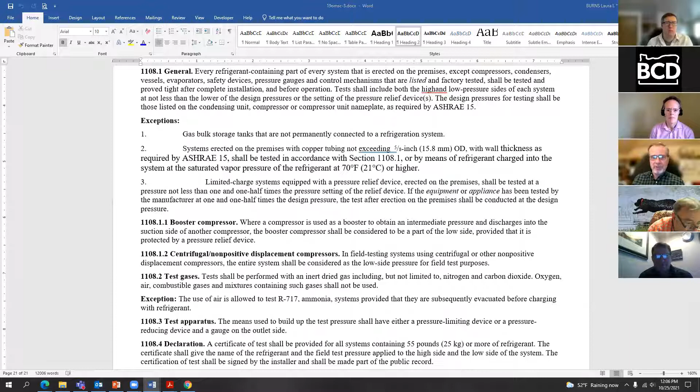So if we can go back to our purple document—it has a lot more information on the pipe materials, the joint connections, and even adding things for pipe in concrete floors, the surface temperatures of piping and how to protect on those, because some can get very hot and some can get extremely cold. And more on identification and additional items for flammable and potentially toxic refrigerants, on what to do, how you protect them, and if they're in a shaft, what to do to ventilate those if need be.

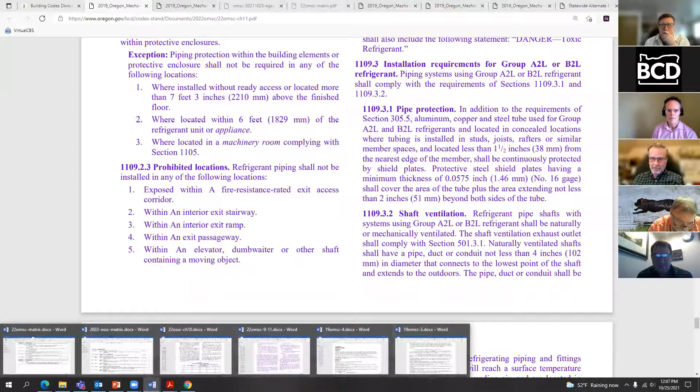I see that ASME B31.5 is still referenced as the design standard, which is useful. I personally like bringing a lot of this material requirement into the code, just so you're not having to dive out of it to another standard that may or may not be sitting on your desk.

So to the group—is the model code language okay to make a move to, with more detail in the code for refrigerant systems?

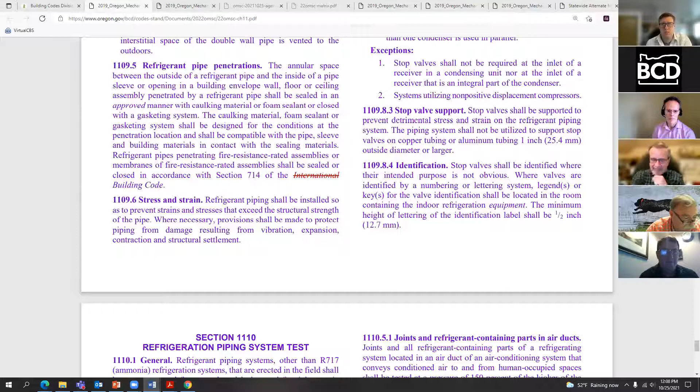I think so. It's an awful lot of information to take in, though. If you'd like to have a little more time, and if you want to come back to it, we can say yes for now. If people see something over the, you know, between now and the next meeting, if you want to come back to it, would that be okay with the group?

All right, so I'm just gonna bump in one more time and guess what I'm gonna say. But Mark, you mentioned there's likely a fiscal impact in there, so as folks are taking a look at that language, if you could be particularly mindful of any specifics you can give me on that, I would appreciate it a lot. Thank you.

All right, with that.

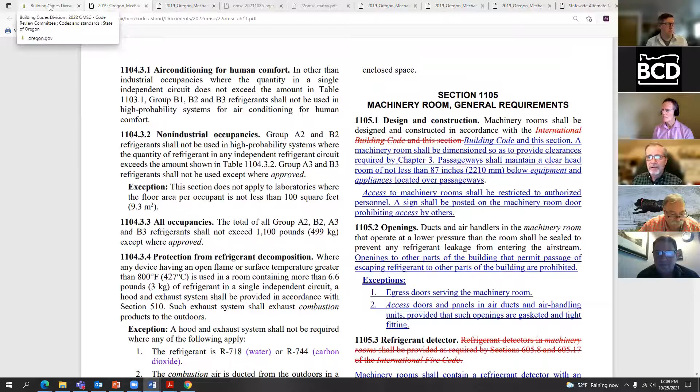There was one last item. Did we cover 11? We didn't cover 11.5 about access port protection, 1102.3, where we...

This is putting in a post occupancy trigger to put on the locking cap valves whenever you maintain a system, whenever refrigerant is added or removed. This was one thing the committee and the division found hard to put into code, to have that trigger when it might be something without a permit pulled, or knowing if someone at a site put refrigerant in, and telling them there's no requirement for a permit, but telling them to put in the locking caps, whether they were there or not, whether it was triggered in the past.

This was a difficult one for us to keep in. And if you can go to...

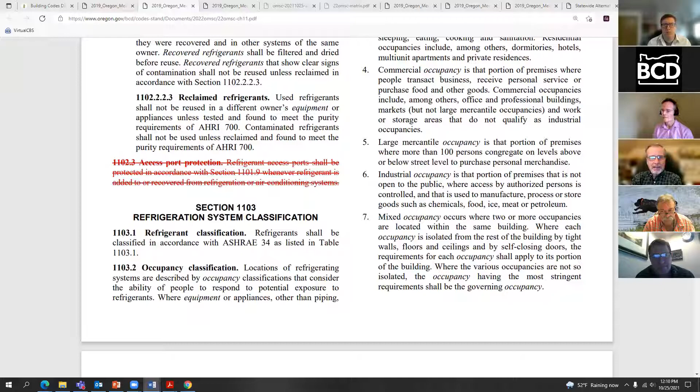1101.9, where is that? The locking access caps. They need tamper resistant caps anywhere except where it's not accessible, such as behind a door, locked hatch, whatever. So this would be a trigger that if you maintain the unit and take a cap off, you need to put on the new locking style.

Is that something you wish to address again, or leave as is, as being deleted in current Oregon?

Well, I think it should only apply to new installations myself. Although if a piece of equipment was replaced, would they then have to put the locking access port caps on? Yes, yes, for a new piece of equipment they'd have to do that.

So this is a trigger if they're going to do some maintenance, say put in 5 pounds of new refrigerant. Is it only at the one they access, or the whole system then you're looking at? I'm thinking only new equipment.

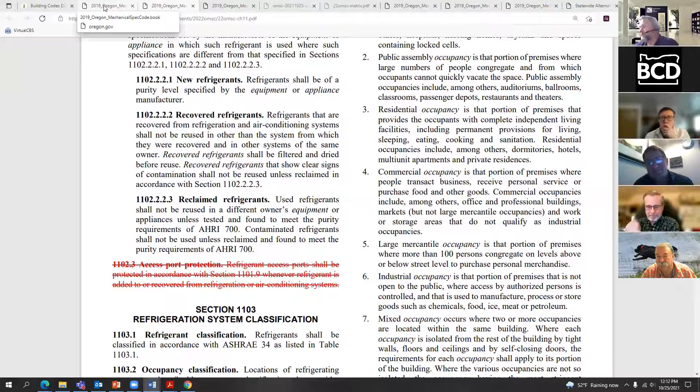Great, that makes sense, because you're not going to pull a permit to add some refrigerant. So right, thank you. So keep that as is, as shown, as a strikeout.

All right, we're down to 12. At 12:10, if we have one item in chapter 12 about modifying for the different, for hydronic piping, to make sure we cover, I believe it's all the different PEX piping when you're doing embedded that had been left out.

So if you're doing a radiant heating system, allowing some of these other more common systems that are used in embedded piping. It's been around, I'm trying to figure out how many, this may even predate my days here.

Any opinions on whether to keep the current amendment change? So this is just spelling out specific requirements, right, rather than just getting wrapped into the approved plastic or pipe. I was going to bring up one thing.

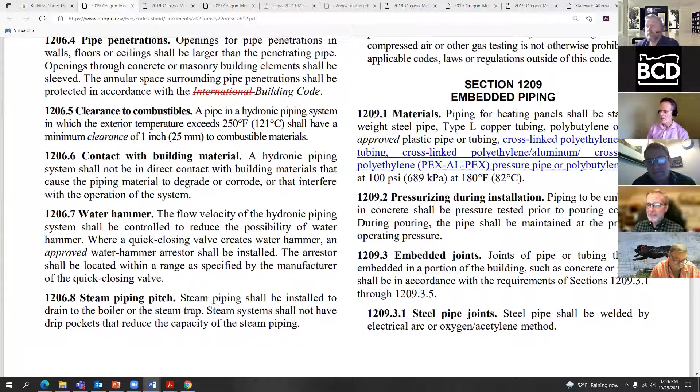All right, so we are there. That is, I believe, the last of the substantive changes through chapter 15.

13 is fuel oil. Solar thermal has been something we have very little in, solar thermal that we handle in the mechanical sections, simply due to it's normally potable water, and we can't do anything about it. Any solar system that heats something under the plumbing code, it all falls to the plumbing code at that point. But occasionally you might see a swimming pool system or something like that, and that's where this chapter would fall in. Photovoltaics, building code, and electrical code.

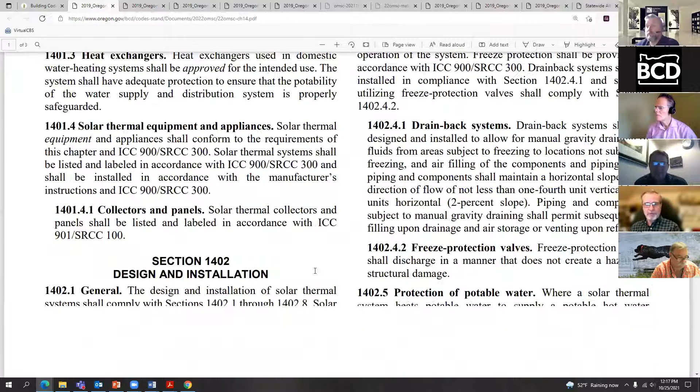Chapter, let's see here.

We can go to chapter 15 just to show the reference standards. We'll make sure those are up to date - that's more an editorial thing for us anyway. As we look through these, unless you see one you'd like to keep as the 2018 version, we can be open to that. If the committee sees fit, we can make that recommendation.

It's 12:15, we can wrap up for the day. I did want to let everyone know that one big item being discussed - the reason ventilation is on the agenda for the next meeting is because of some proposals that have come in.

It's going to be very tricky from our standpoint and also the commercial code standpoint. The way we currently read code in Oregon is that chapter 12 is the building code - natural ventilation is the building code world. They look at the windows and determine whether you can go the natural ventilation path. If it's mechanical, it's all chapter 4. If it uses a fan to move air in and out, whether exhaust or fresh air, we're using chapter 4.